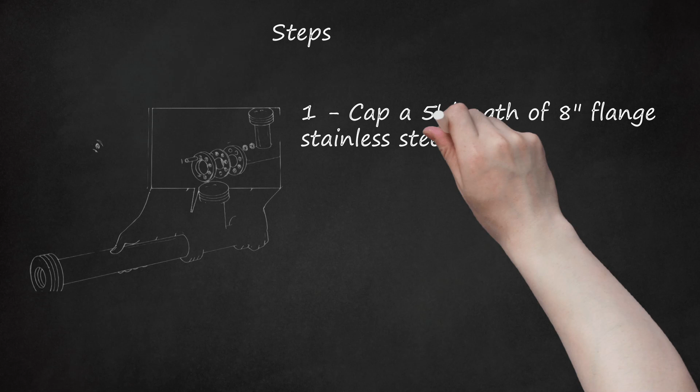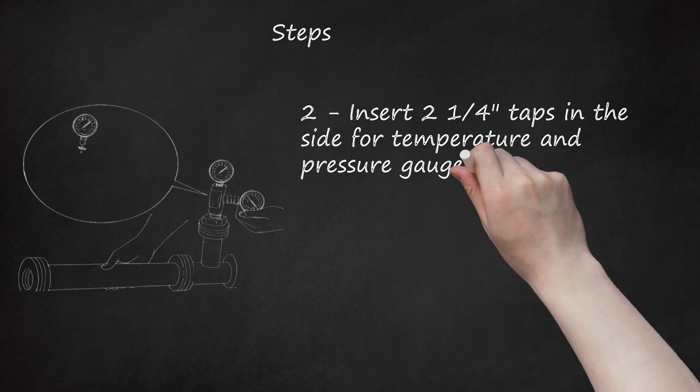Steps. 1. Cap a 5 length of 8 flange stainless steel pipe at both ends. Ensure the top cap is removable. 2. Insert two 1/4 taps in the side for temperature and pressure gauges, and a 1/2 tap in the bottom. 3. Run for 3 and then through a 1/32 restriction, 1/2 pipe.

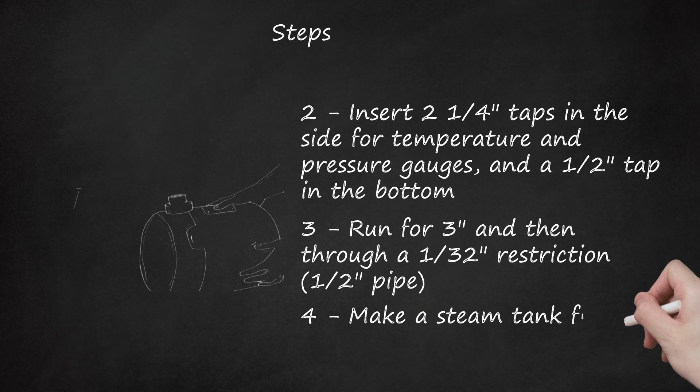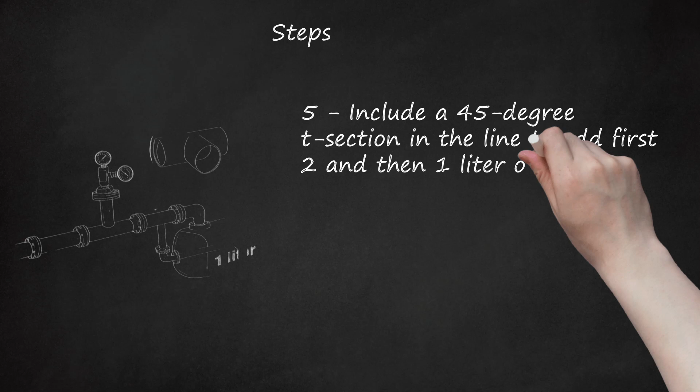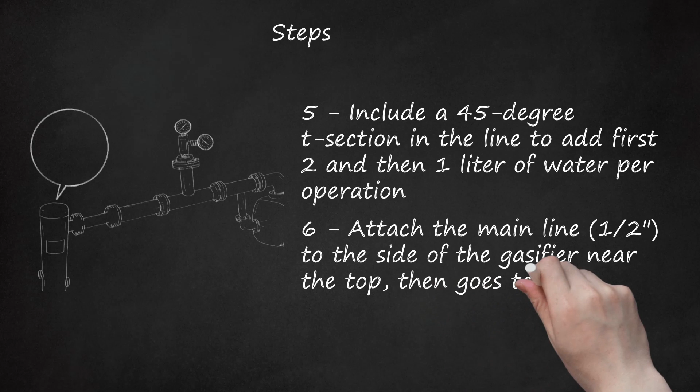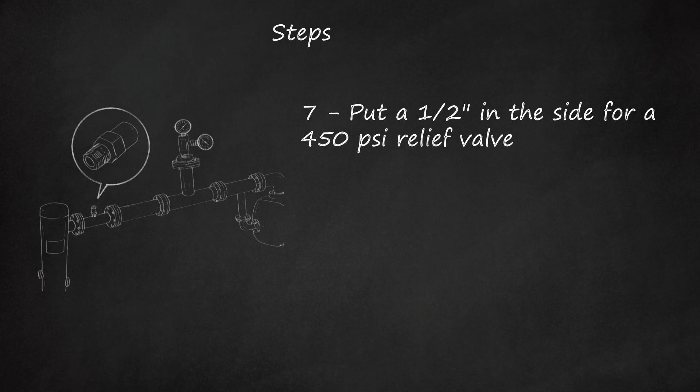7. Put a 1/2 in the side for a 450 psi relief valve. This unit should run at 800 to 1000 degrees Celsius, 1470 to 1830 degrees Fahrenheit, and around 30 atmospheres. 8. Make the ash filtration unit out of 1' of the 8 pipe.

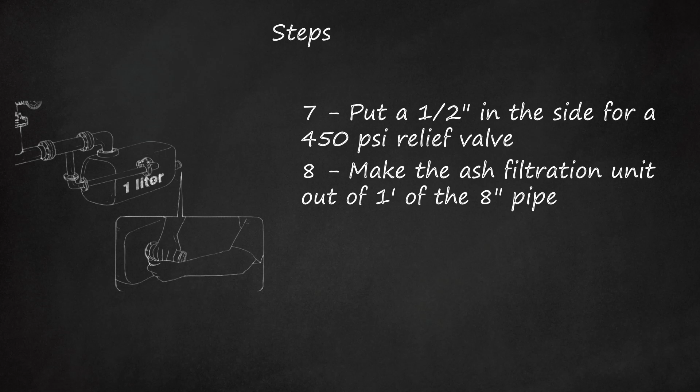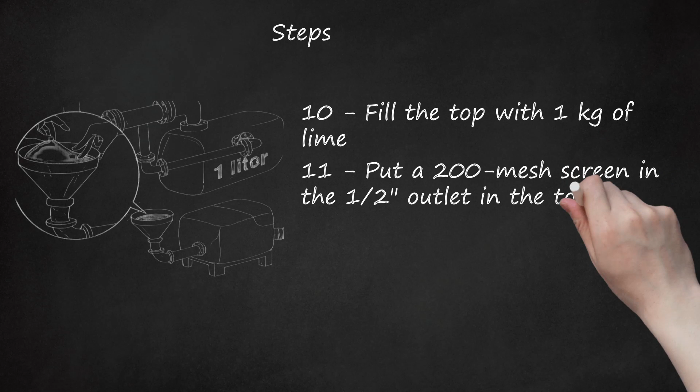9. Put the 1/2 inlet pipe down through the 200 mesh screen placed 9 into the filter. 10. Fill the top with 1 kilogram of lime. 11. Put a 200 mesh screen in the 1/2 outlet in the top. 12. Run a 12 loop of the 1/2 water pipe, schedule 80, through here too. 13. Make everything after this of standard steel, it's much cheaper. 14. Run a 1/2 pipe to the 4-way junction.

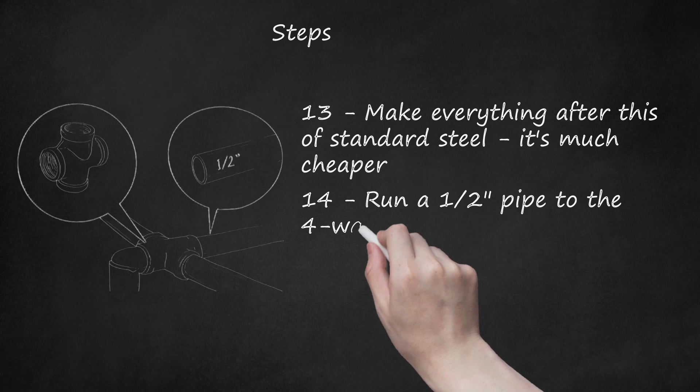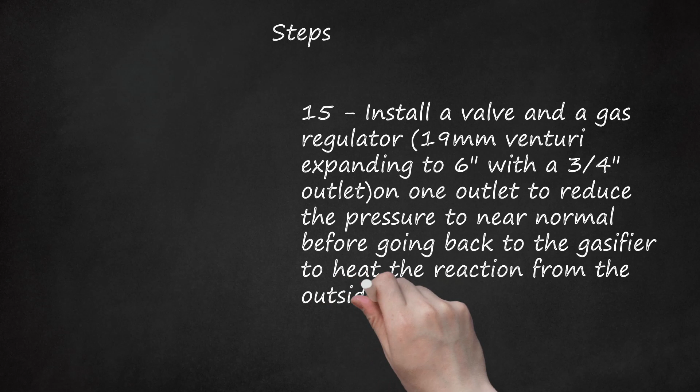15. Install a valve and a gas regulator, 19 mm venturi expanding to 6 with a 3/4 outlet, on one outlet to reduce the pressure to near normal before going back to the gasifier to heat the reaction from the outside of the unit. 16. Build rings of gas nozzles, 1 column each on 4 sides of the unit, with 6 nozzles each. 17. Make a heat shield. Constructing a heat shield, bricks, etc., over this will work well.

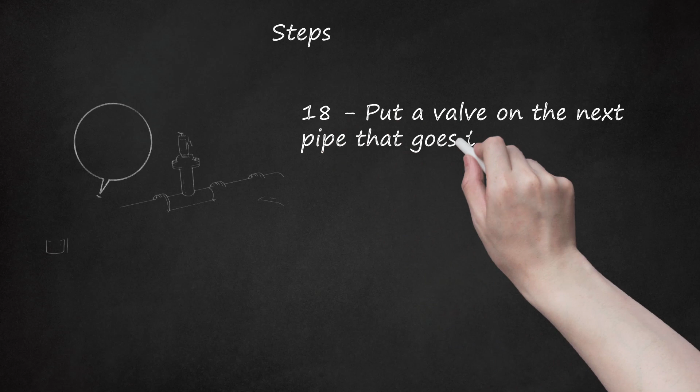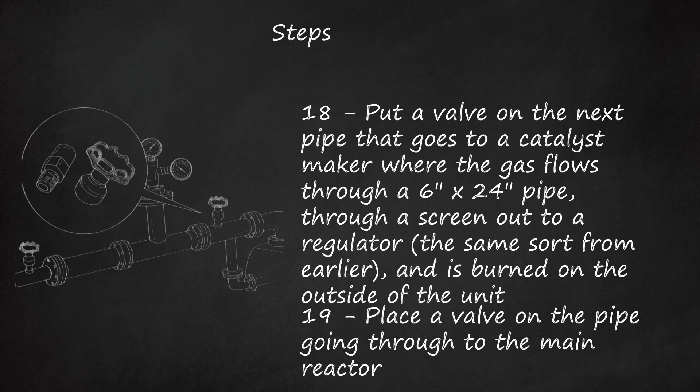18. Put a valve on the next pipe that goes to a catalyst maker where the gas flows through a 6x24 pipe, through a screen out to a regulator, the same sort from earlier, and is burned on the outside of the unit. 19. Place a valve on the pipe going through to the main reactor. To make catalyst, shut off this valve. To make fuel, shut off the catalyst maker valve for 4 hours. To test the relief valve, close all valves.

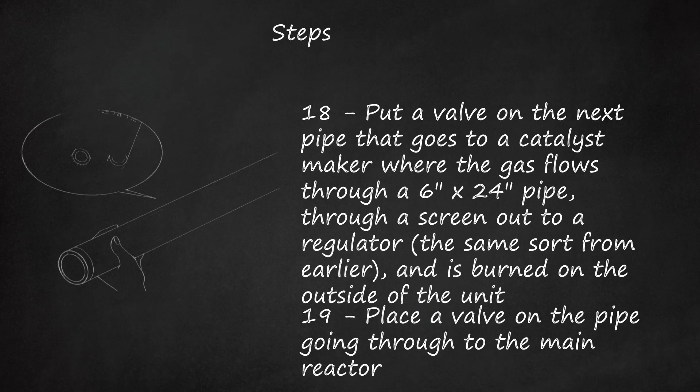20. Build the main reactor. Start with 8x5 schedule 80 pipe, anything in this part should be made of S80. 21. Cap it off at both ends. 22. Make a ring of 1/2 coolant pipes around the inside surface of this, plus a 1/2 in top and bottom for the gas and another one in the top for catalyst loading. 23. Put a screen about 6 from the bottom and make it slope downward towards the inlet pipe. The catalyst outlet is at the bottom of the unit through the inlet T section with cap.

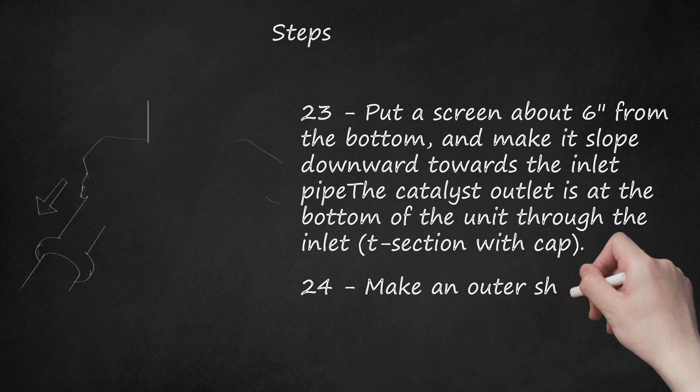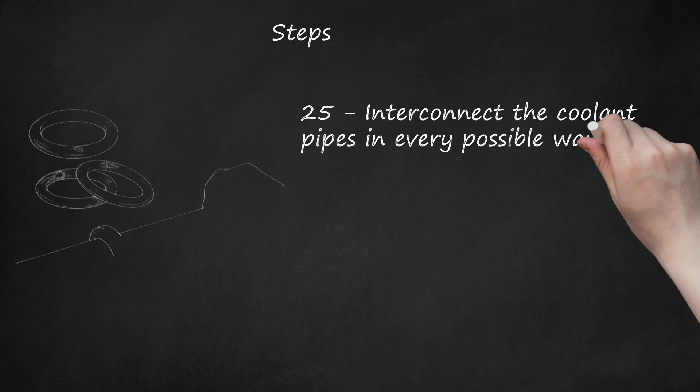24. Make an outer shell of 10 pipe with enough clearance to put caps on this pipe as well with the main reactor inside. 25. Interconnect the coolant pipes in every possible way, with a main outlet on both top and bottom manifolds. 26. Fill the coolant system with distilled water. 27. Make a sizable square radiator, with a steam-powered fan and return pump and a steam relief valve set for 100 atmospheres. 2 horsepower should be enough for both.

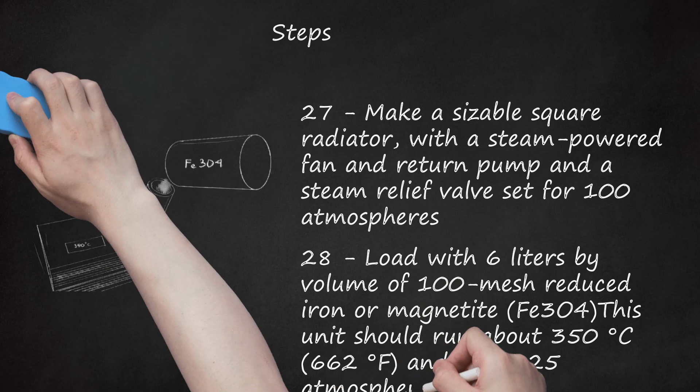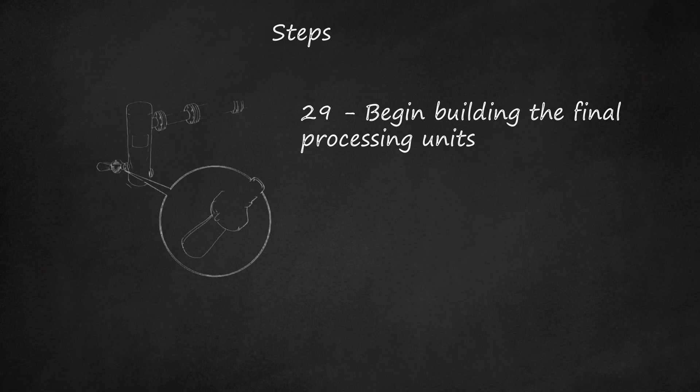28. Load with 6 liters by volume of 100 mesh reduced iron or magnetite, Fe3O4. This unit should run about 350 degrees Celsius, 662 degrees Fahrenheit, and about 25 atmospheres. Steam at 1300-1400 psi. 29. Begin building the final processing units. A 3-8 venturi expanding to 6 and then capped will expand and cool the gases.

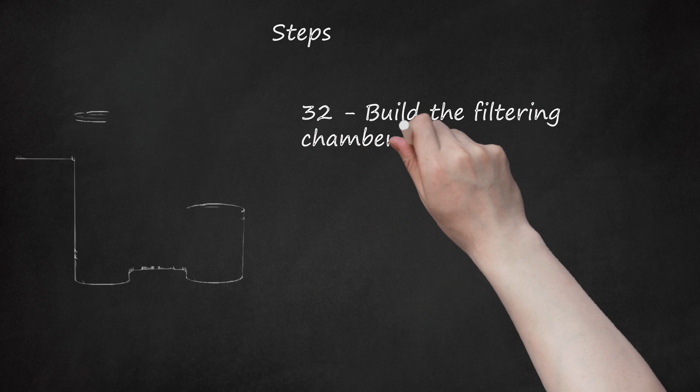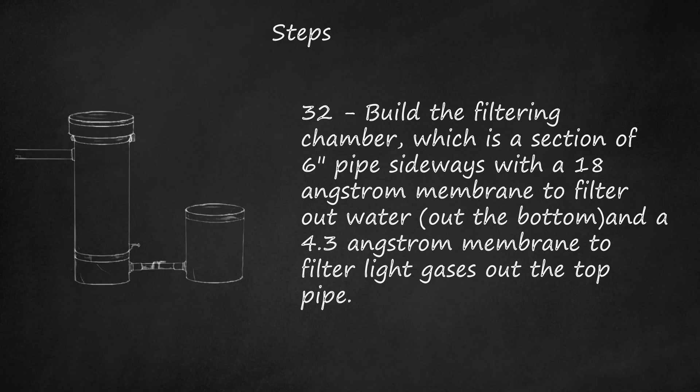30. Ensure that the gas-water mixture drops to room temp by running some of the coolant line through the regulator in the last step. 31. Run 3/4 to the filtering chamber. 32. Build the filtering chamber, which is a section of 6 pipe sideways with an 18 angstrom membrane to filter out water out the bottom, and a 4.3 angstrom membrane to filter light gases out the top pipe. The water is returned through a 500 psi 1-way valve to the tank, the gases to a 5 gallon storage tank that's connected to the main reactor burners, and the fuel to a grounded, vented storage tank with a meter and pump.

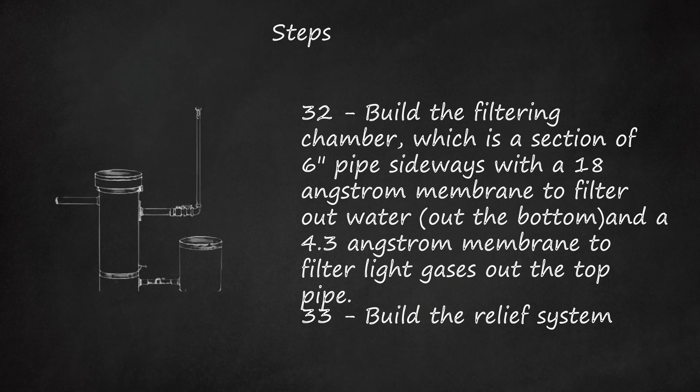33. Build the relief system. The pipe from the relief valve goes through a gas regulator with a 4 mm nozzle and then straight upward for 6 feet, 1.8 meters, and the top 6 is perforated with 4 holes. 34. Run a small pilot light, 1/8, from the main gas storage. It should be kept lit while the machine is in operation.

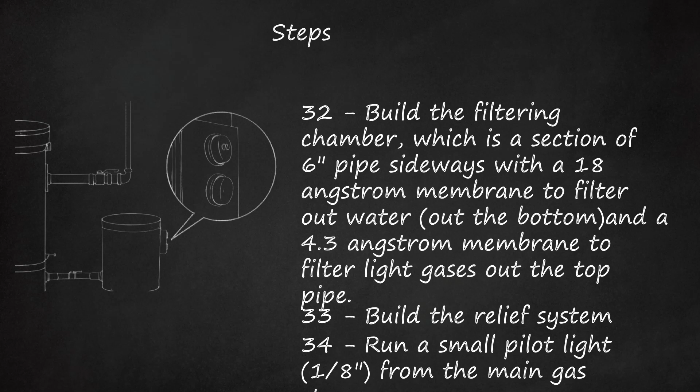Happy motoring! This thing makes 1 gallon at a time. It will take 15 minutes for the reaction to complete. Tips. The help of a certified engineer or mechanic would be useful before trying to make gasoline. If no one is available, buy the EIT manual and teach yourself engineering. If more power is needed, one solution is to re-spec the machine so that 10% more input, and thus 10% more syngas, is used to run a superheater for the steam.

It is recommended that the trash be shredded. A possible design for a continuous feed is to use the steam to run motors up front that run a grinder and a piston feed. Don't forget to add 10% ethanol. Similar diversions of gases to run pyrolysis could be used, or an air compressor to run steam and air autothermal gasification.

Warnings. Do not smoke or have any source of sparks or flames when making or handling the gasoline. Touch a metal object before you handle the gasoline. Static electricity is dangerous and can cause explosions and fires. Ensure that everything is together tightly so no explosive liquids can leak out. Things.